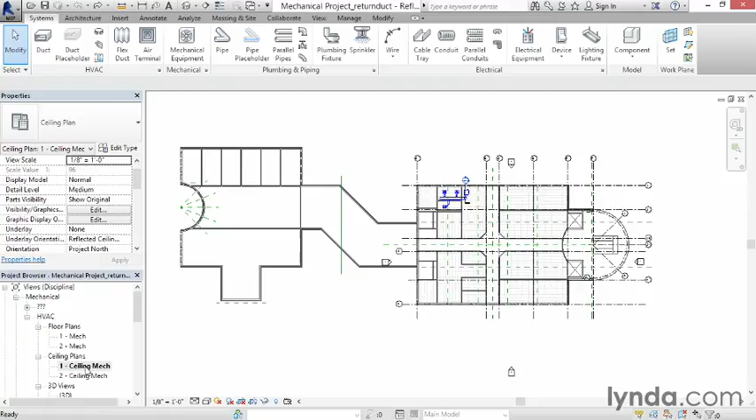Let's zoom in on this area here. Let's select our diffuser and click the copy button. Let's copy it down to this bay right here. Let's hit escape a couple times.

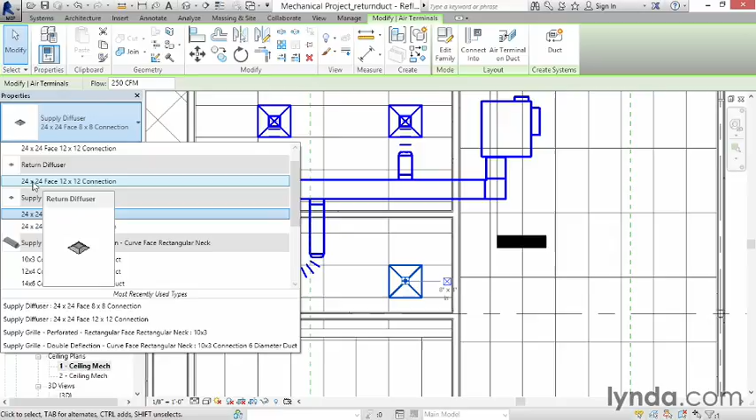Select your new diffuser and verify that it's still at 8 feet. Let's click the properties drop down. Let's put it on return diffuser, 24 by 24 face, 12 by 12 connection. With the diffuser still selected, let's uncheck our up arrow, right arrow, left arrow, down arrow, and hit apply.

Now let's hit escape. We'll see it knows it's a return diffuser, but it doesn't know what system it's on yet.

I'm going to pan down so I can see my entire system. What we're going to do next is draw a return duct line. It's going to go from here, up to 14 feet, down, and over the top of this diffuser. But there's one challenge that we need to deal with before we can do that, and that has to do with our view range.

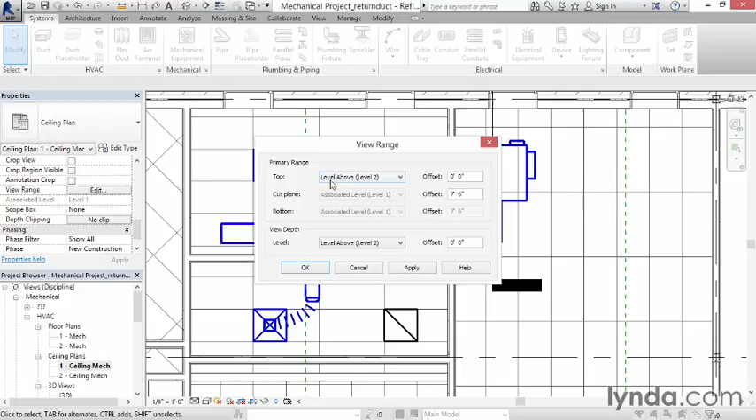In the properties, I'm going to scroll down to view range and click on the edit button. For my primary range on top, I want to go to associated level, level 1, and I'm going to offset that 15 feet. For my view depth, I'm going to do the same thing and offset this 15 feet. I'm going to hit apply, then OK. This will give us enough view clearance so that when we draw our duct up way higher than this duct, we'll still be able to see it.

Select your VAV and click on the return symbol. I'm going to draw a duct right up to about here, then start coming back in this direction. But what I'm going to do is offset this 14 feet.

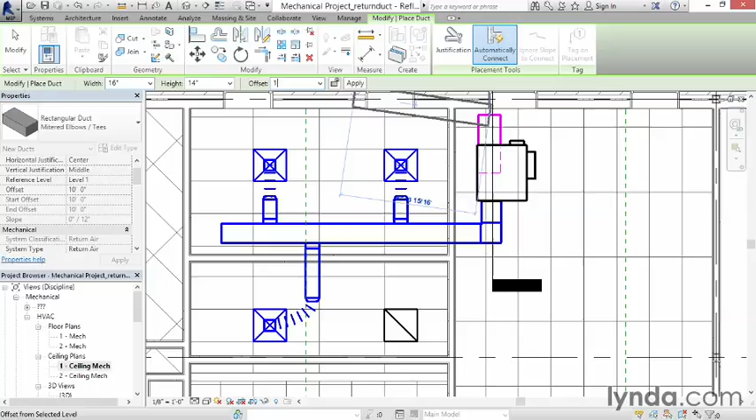I'm going to hold my wheel down and scroll around in the drawing area just a little bit. Notice that we're drawing this at 14 feet, above all of our other ducts. I'm going to pick a point right about here. Now I'm going to draw this over past my diffuser just a little bit, and pick a point right here. Now I'm going to hit escape.

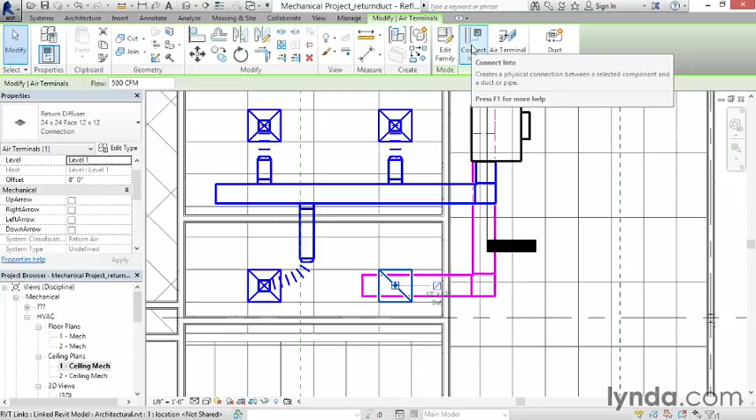The trick now is, how do I get this diffuser to tie in with this duct? What we're going to do is select our diffuser, click on the Connect Into button on our layout panel, and select a piece of duct that we want to connect into. This is going to cause a drop from our piece of duct to our diffuser. Once you've done that, hit escape a couple times.

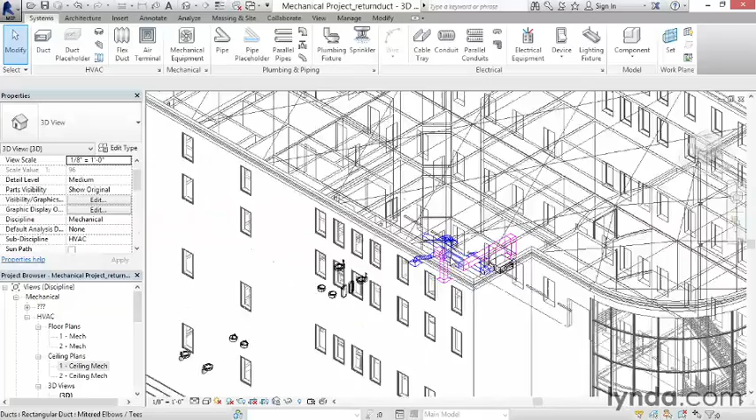To verify that this is all working out, I'm going to go to a 3D view. I'm going to zoom in on my pieces of duct, hold down my Shift key and my wheel button, and pan around just to make sure that I have all my clearances. It looks pretty good. I'm going to go back to my One Ceiling Mech ceiling plan and click on my Close Hidden Windows.

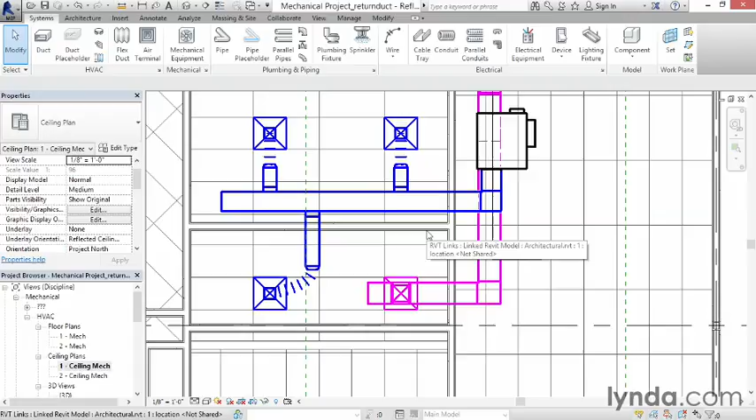Now, with two systems in place, you can start to see how duct is going to quickly start filling your model. Cut as many sections as possible so you know where you are. Don't get lost in the ducts.